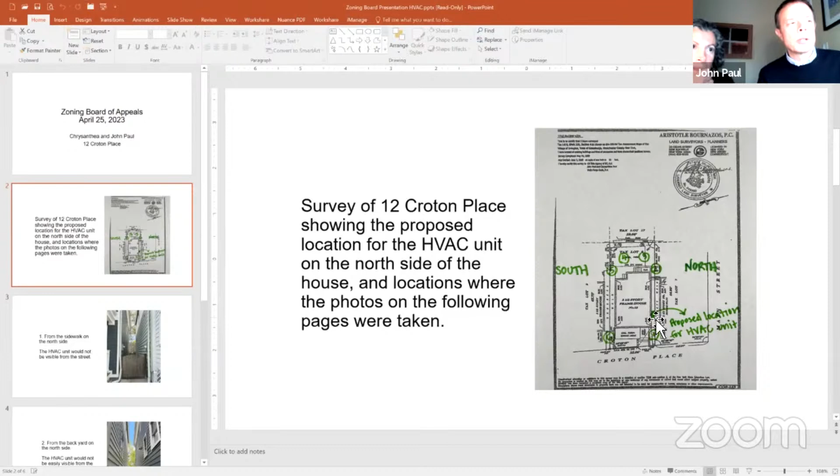Okay, so here on the second slide of our presentation, you can see there's a survey of the house. You have a copy of this survey in the application materials. We have marked the point here on the survey where the exterior unit would be added. It's about 14 inches deep, and you probably know this is in one of those alleyways between our house and our neighbor's house.

This is a view taken today from the sidewalk in front of our house. You can see there's a gate there, and the new unit would be down against the foundation of the house, so it would not be visible from the street. This is a view back up that same alleyway between our house on the right and our neighbor on the left. The HVAC unit would again be down by the foundation between us and that hose, if you can see it there, and it would be only slightly deeper than that hose. It's about a 14-inch reach into that alleyway.

Another point to point out, we have talked to our neighbors about this. Where it would be located would not be easily visible from their house either. Their windows tend to look straight into our kitchen, and there's a stairway here. You'd have to poke your nose against the window to be able to see our new unit down there.

So where's the property line? Approximately down the center of that alley. So it's shared between you and your neighbor. Yeah, that's correct, the alleyway. And it's shown on the survey. We could go back to that if you'd like.

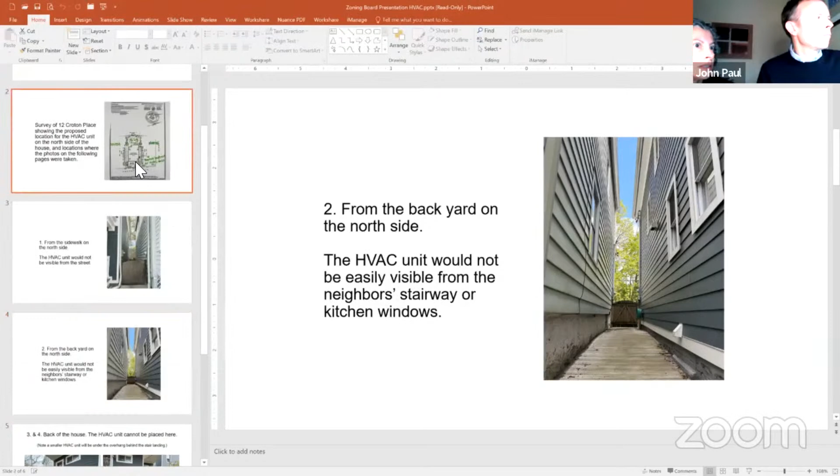Can you make that bigger? Give me a moment.

So you can see the surveyed property line down the center of this alley. There's the wall of the neighbor's house, our neighbor's wall. It wouldn't stick that much into the alleyway. It was just a big Sharpie, so.

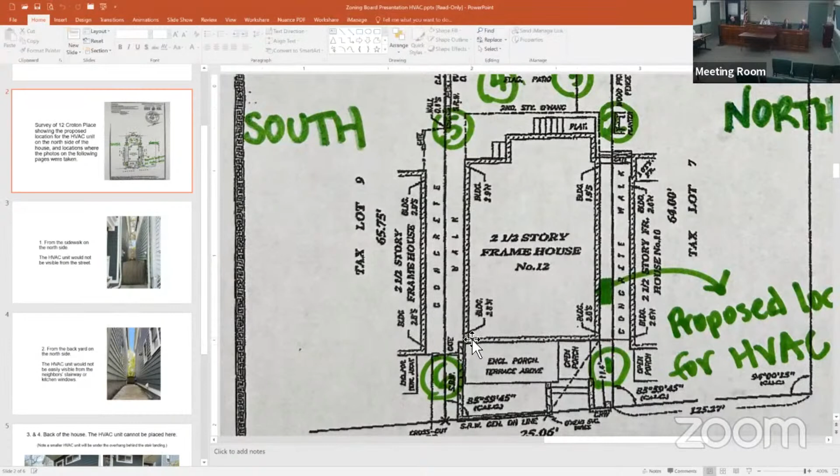Can you get past it without trespassing on your neighbor's property? It wasn't a joke, that was a question. Can you get past it? It would not intrude onto the neighbor's property. What if it would allow you to pass from front to back without having to go onto your neighbor's property?

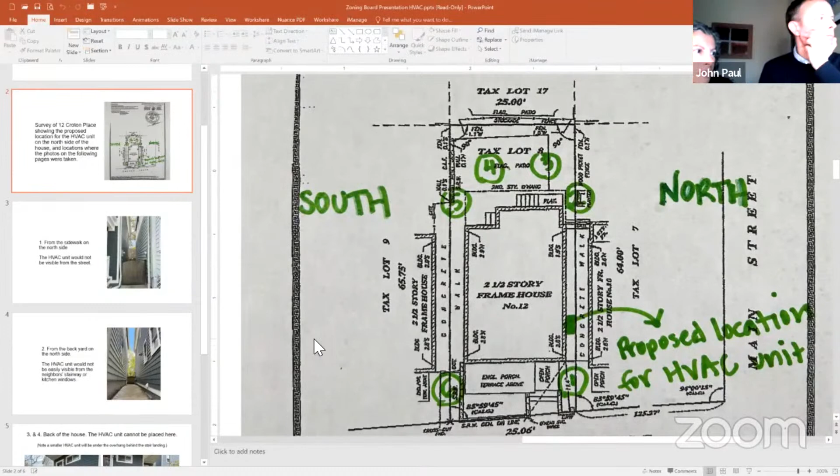If you go, John's bringing up the hose that you see in that picture is just a little bit shallower than the unit that's going to be there. So they can certainly, yeah, we could get by without going onto their line, I guess.

And what about the noise? Is this the north side? I'm sorry, what was the question? Is noise, will it be making noise? Oh, it's a very low decibel unit. We have been told that unless you're within 6 feet of it, you can't really hear it.

I think like 20, but certainly the house next door is within 6 feet of it. Yes, 22 decibels when you're right there, right on top of it. But the house next door is within 6 feet, might be about 5 feet away, but of course the nearest windows are farther than 6 feet from that.

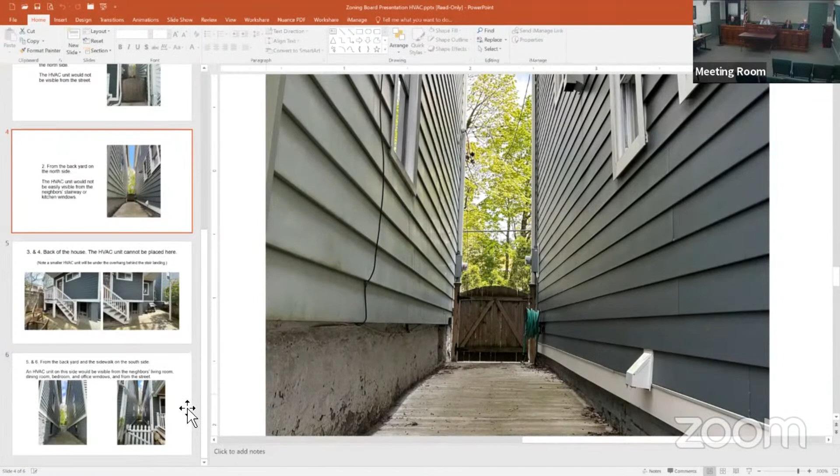Okay, any other questions? Yeah, I had two questions. In the beginning of the call, John, I think you mentioned you were installing a couple HVACs, or is this one of many, or is it just the only one? And then the second question is, I read in your submission that the backyard wasn't feasible, just to expand on the backyard option.

So another smaller unit would be under the stairway in the back here against the foundation wall that you can't really see in this photo. But the other one is just too tall, unfortunately. That's where we wanted them both, but they wouldn't both fit. And you see where the grill happens to be in this photo, it can't be there because that's an egress from the house.

Right, and you couldn't use the smaller one to replace the larger one with the one that now fits under the porch there? Again, the larger one wouldn't, it's just too tall to fit. No, I understand, but couldn't you use the same size unit on the side of the house as you're using under the porch? No, the one under this stairway is going to be for 2 units.

The other one's going to be for 5 units, so it's bigger. Otherwise we need like 3 units, 3 exterior units. Right, 3 exterior units, and that's not a good solution either. And they all three would not fit under, even if we got three small ones, they wouldn't all fit under this stairway because there has to be clearance for the air to move and stuff like that. So that's not a solution either.

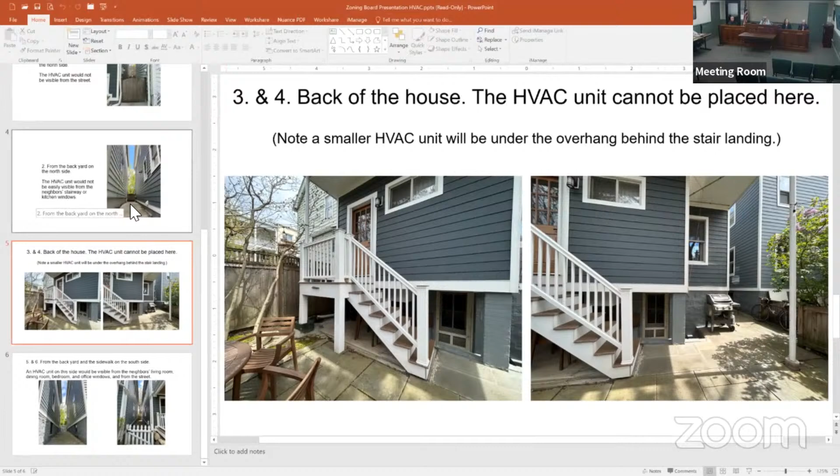Any other questions? Anybody from the community wanna weigh in? There's nobody here. Okay, no hands are raised. Anybody else from the board have any questions?

I'm gonna make a motion to approve. Obviously, we don't love giving two variances, but this seems to be sort of the only solution to do what you want to do with the property, and it's a pretty modest ask, all things considered. So I will make a motion to approve. Do I have a second? Second. Great. John?

Yes. Yes. I'm gonna say no, because of the fact that it's so close to the other property, I think it sets a horrible precedent. I mean, you already have a system, you can continue with the system. I understand everyone wants to turn into electricity, it's the way to go these days, but I think that just too much infringes on the neighbor's property.

Judd? Yes. No. Okay, so you are approved. I will send you a letter tomorrow. Great, thank you so much. Thank you very much. Good night.

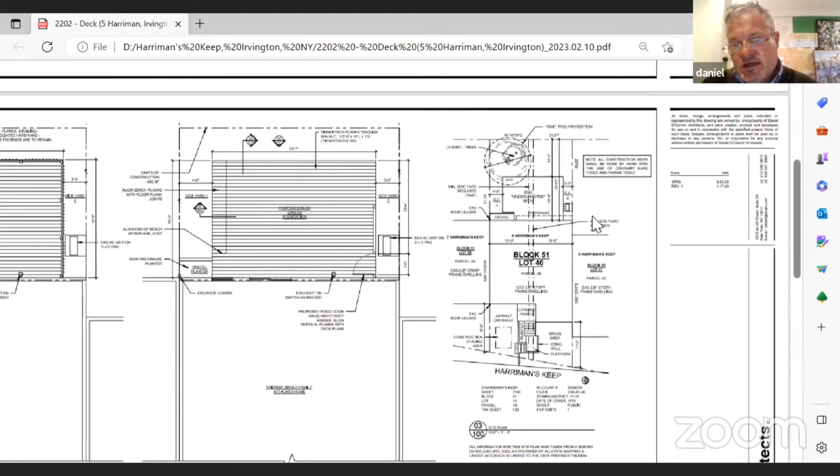And without the deck, is the property over allowable coverage, or within allowable coverage? Well, according to the general zoning coverage requirements, the property itself wouldn't meet those requirements. Right, I guess that's what I'm saying, meaning the house is over. The house is definitely over, yes.

And here we can see our schedule, right? And it is literally the same size, you're literally just replacing the deck.

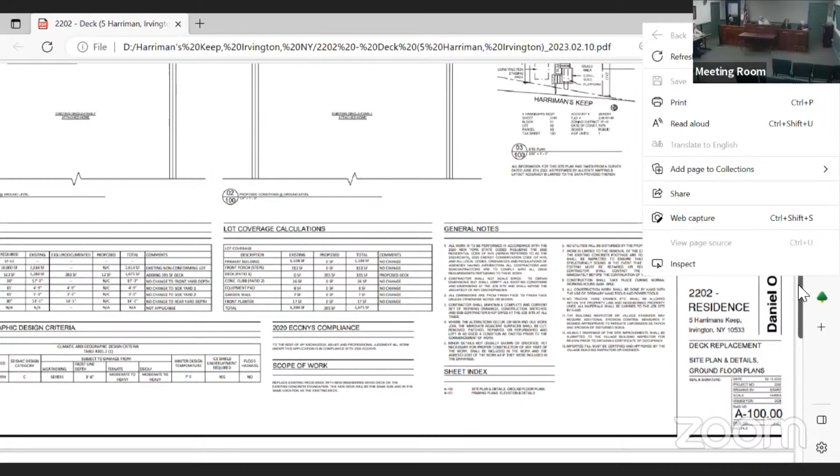Yes, repairing it. Except, I understand the woman who owns it said you're not putting up the railings on the deck. Where the railings would become an issue? No, not particularly, I was just observing that's the only difference, as I understand it, between what's there now and what will be there if we approve the variance.

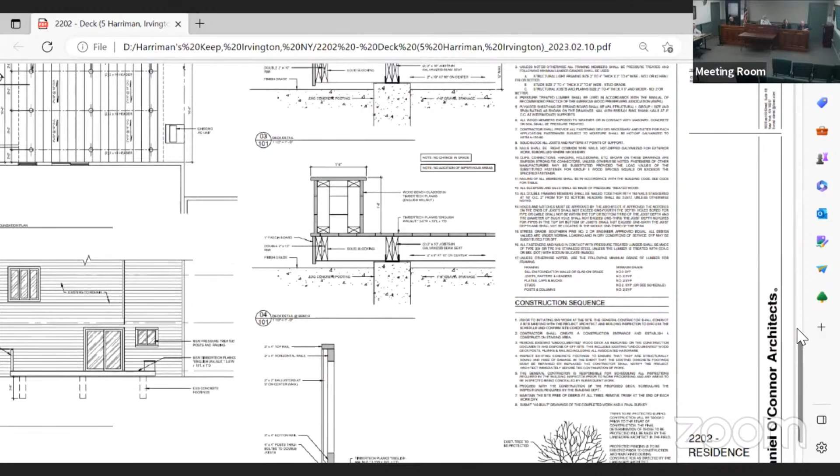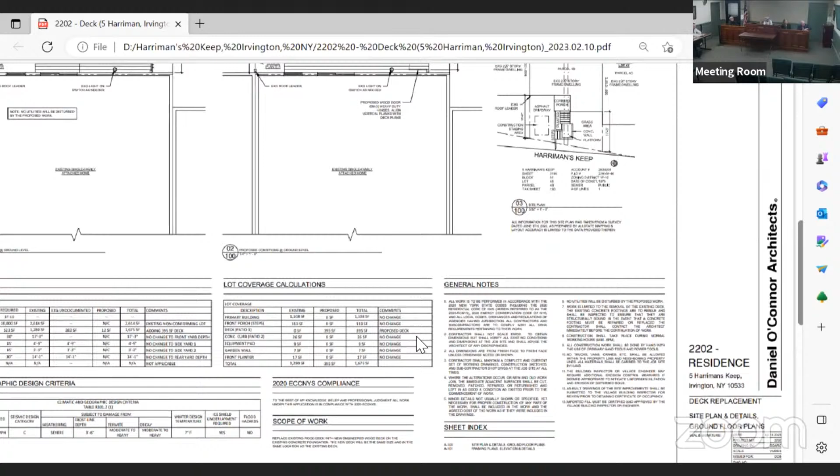Annie, could you make the lot coverage calculations at the bottom of this page bigger? Yeah, thank you, that would be great. Just zoom in. Sorry, because I'm not on my regular computer. Okay, does that help, a little better? No, I can't read the lot coverage calculations, I'd like to see them.

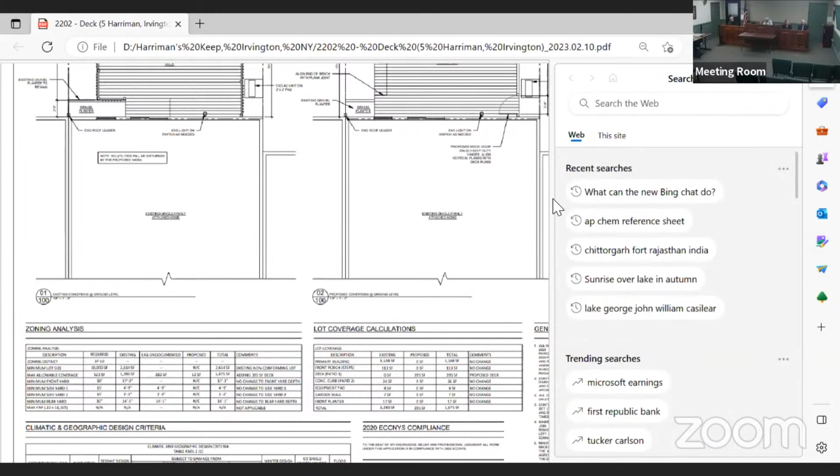Sorry, because I'm not on my computer, so I'm not familiar with this. Let's see, I don't think I can right now from here. Right where that plus sign is on the right side, could that maybe help you out? I've been trying, but it's giving me other stuff, other things, be careful with that.

Yeah, I can read it. We don't want to see other things. No, nothing else. I think this is as big as it can get. Can you read it to us?

Can you tell us what the coverage is? Sure. So the lot coverage of the primary building: existing is 1,100 square feet, proposed 0, total 1,100 square feet. Front porch steps: 112 square feet, proposed 0, total 112 square feet. Deck patio: existing 0 square feet, proposed 395 square feet, total 395 square feet.

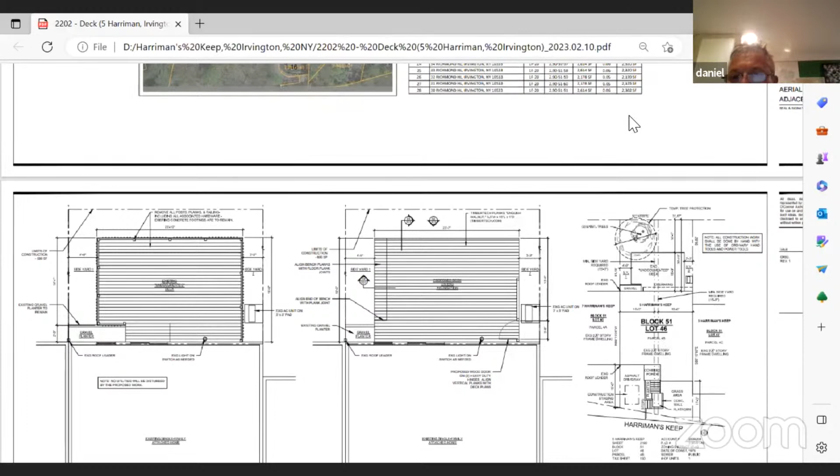There's 2 things I'm missing before I would approve this. One, I want to know if everybody else has a deck of the same size. And number 2, we have aerial analysis as well of the other 8 decks that are out there, I want to know how many are documented.

Yeah, I think those are fair questions. So I would suggest we adjourn this for a month, come back and tell us whether everyone else has the same type deck, and I'll go out there, I guess, and I apologize. And I'd like you to, and it's up to the chairperson obviously, tell us whether those 8 other decks or 7 other decks are documented or not.

How will it change what we do? I think we need to have a better record before we make a decision, is my point. I think it's important. Because if they're documented, and variance has been granted to all the neighbors, then it's an easy thing. If the variance has been granted to 2 of the neighbors, I think it gets harder. And I think it's better for us and for the board, for the community.

Understood. Everything was already approved by James Hahn Engineering and Ed Maron and everybody. I mean, I understand that's subject to the variance, a little confusing, but that's all good from their end, but they're looking at something different than we're looking at. So I would endorse that.

Look, 33 is a little high. It is, 20 I'm more comfortable with, but you're right, I was using the higher number rather than the lower number, and 33 is a little high.

I think it would be good for everybody to get the chance to get out there, but more importantly, I would think if you could do a comparison with the other 8 units there and let us know the size of their decks, and pull the property cards and find out if those are approved or not. That's not terribly difficult to do.

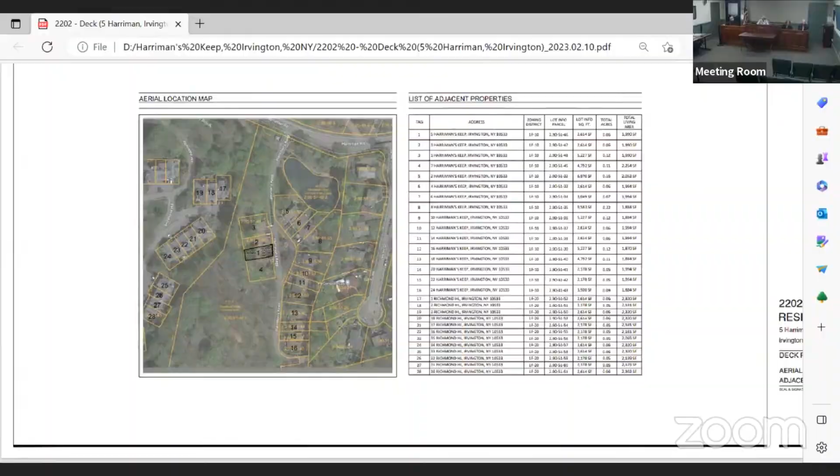Okay, so the next application is 33 Osceola Avenue.

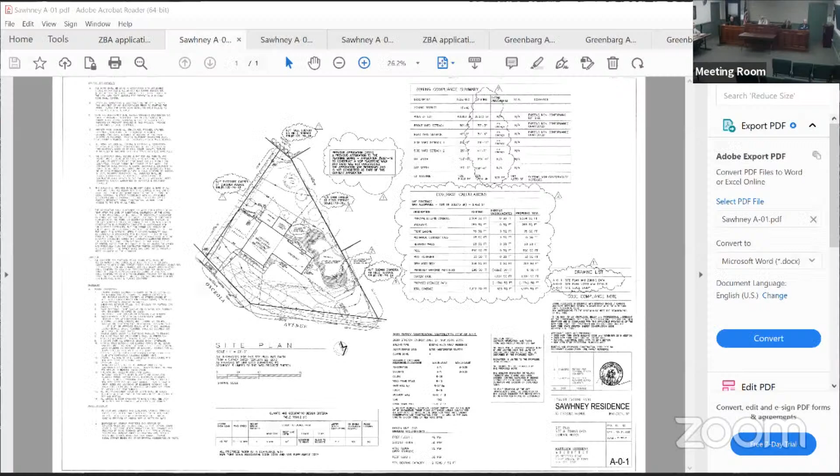Good afternoon, can you hear me? Yep. Ken, thank you, hi, how are you? Good evening, I'm gonna share my screen. Let me see if I can blow this up a little bit. Adjust your camera so we see more than just your mouth - we can see your eyes now. There we go. I'll have to sit back a little bit, let me just pan this out a little.

This application is to legalize an existing concrete patio at 3 Osceola Avenue. It's a little bit of a complicated application, I'll try to walk you through it. This is an existing concrete patio that was built in 1988 along with the pool. The shaded area here shows the area of the concrete patio. It predates the current owner.

This was all uncovered after the sale of the property, I believe in 2015. The current owner had submitted an application to the planning board to do some other improvements - doesn't matter what they were - and it was uncovered that the patio had been undocumented. So he put the brakes on the other application, and we're going through the process of getting this patio legalized. It does exceed the allowable coverage. I'll zoom in on the compliance summary - one of the issues here, let me just see if I can zoom in.

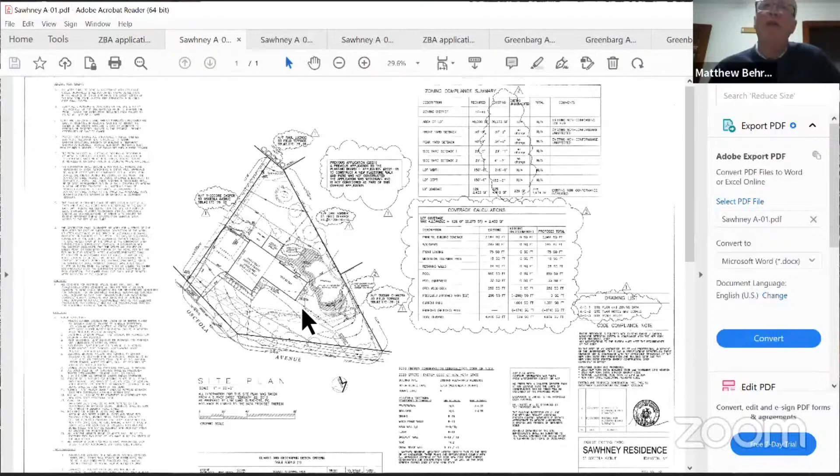One of the issues that makes this more complicated is that there's also a sewer easement. You can see my cursor here runs right through this section of the patio. So we have proposed to take this section out, about 174 square feet that we will be removing. This will decrease the existing coverage and eliminate the issue of being in that easement. So I'll jump up to the zoning summary.

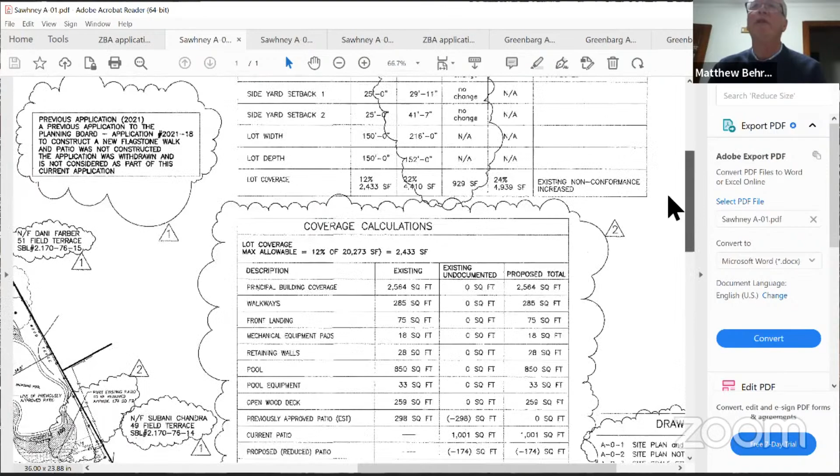For the coverage, the allowable coverage is 2,433 square feet. This is an undersized lot - it's the R40, a 1F40 zone, and it's a 20,000 square foot lot. So the lot is half the size of the zoning requirement.

So what we did is go back through trying to document and find what was documented for the initial pool installation in 1988. They were like back-of-a-napkin kind of sketches, but we were able to find that there was a previously approved patio. I put 'estimated' because the information is very sketchy, but it was approximately just under 300 square feet. So the current patio is about 1,000 square feet.

So it's an increase, and then we're taking out the 174 square feet where the easement is. So it's really just a net add between the previously approved patio and the existing undocumented area of 529 square feet. However, it is still a net add in an area that only allows 2,433 square feet. So it is a significant increase.

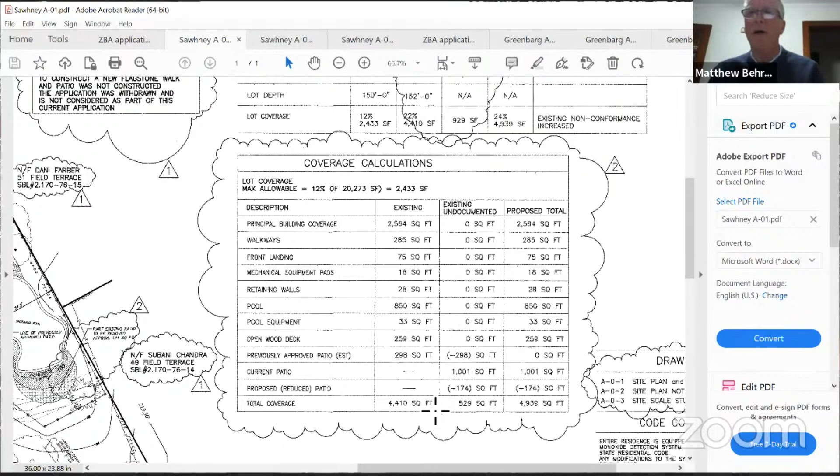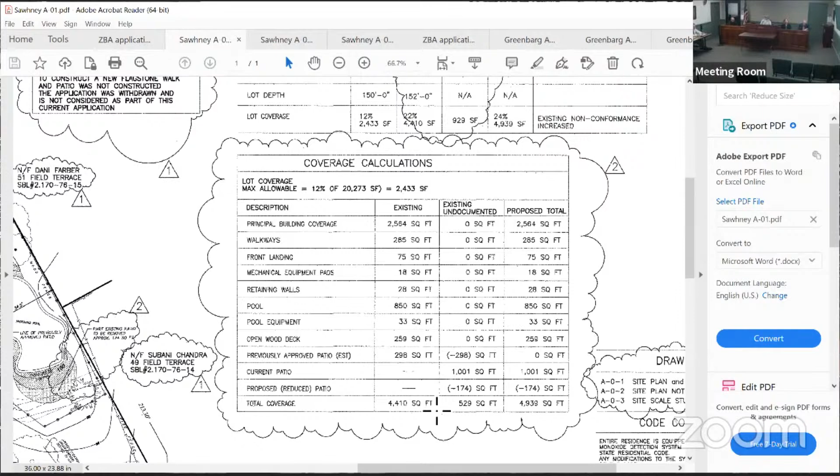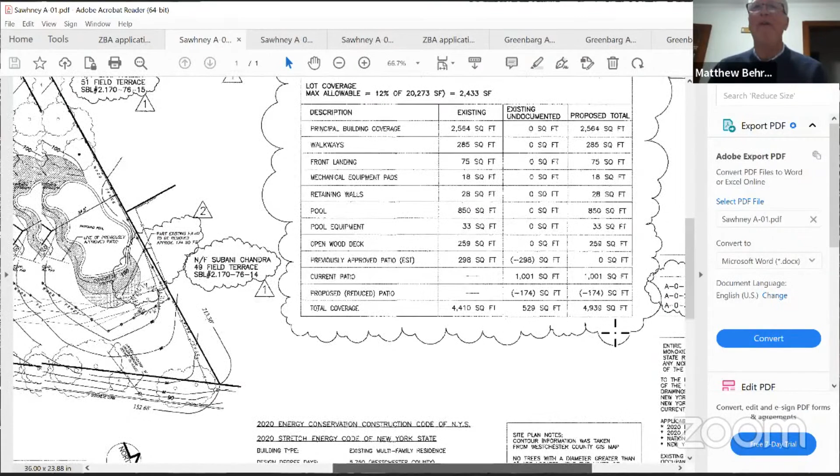It has also been in existence now for quite some time - since 1988. The property owner has owned the property since 2015 and does have a good relationship with the neighbors. The property is completely fenced around the pool, so it's not even visible - it's a solid fence. Despite the numbers, I think it is minimal impact. We are also proposing to decrease the current coverage by about 174 square feet.

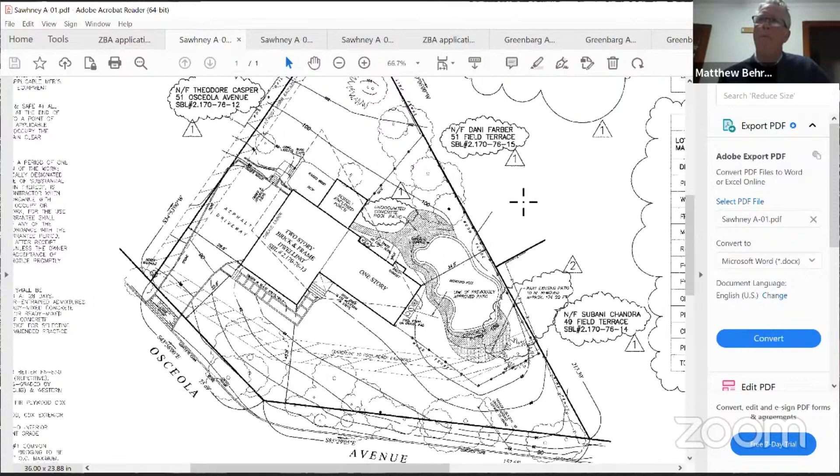When was that approved patio, which you said was about 300 square feet, when was that approved? That was approved with the pool in 1988. With a variance? That's a good question, I don't know if a variance was granted. I would imagine it was, yeah.

So the allowable there is 2,433. You are at 4,410, yes. Presently with the undocumented - that's with everything. That's all in, 4,410. That's without the patio though. That all includes the previously approved patio, the 4,410. It's at 200% plus of coverage, right? Yeah.

So I'm just curious, with the variance for the pool, was the patio already there, or did the patio get built at the same time or shortly thereafter? Like I said, the documentation is very sketchy. What did the building permit say? The building permit only references the pool, it doesn't reference anything about the patio. But the documentation that was submitted with the permit was a one pager, looks like it was drawn by hand, and has an outline of a patio. It's not called out, it's not described - it's just a line that comes off of the pool and connects the pool to the house.

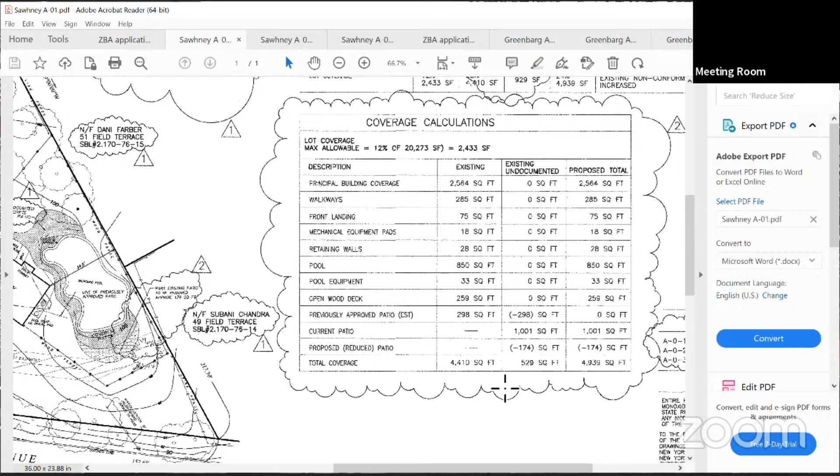And yet you had to take the 174, not as a gift, but because it was over the sewer easement, right? So we could have cut back just that section that's over it. We've taken out a little bit more to kind of round it off. Is there anything more that you could take out so that you just break even?

Well, possibly. Let me just slide back over to the plan. Right now, this section has no patio on this side because it's up against the fence. So really, this is mostly for maintenance, to get around, to skim the pool and whatever else you need to do, get in and out of it. I want to be able to maintain something around the edges because there's nothing here. So you only have access around these three sides, top, bottom, and side. But the right side here, there's no patio on that side. There's no other coverage anywhere else that you could add.

Exactly. Right. So, Artie, my view is that a pool without a patio is unusable, right? There has to be a patio somewhere. I don't know how big it has to be. I've seen pools with nice trim grass around it, but that's okay. That does exist in Southampton. Yeah, we don't do that on the Cape.

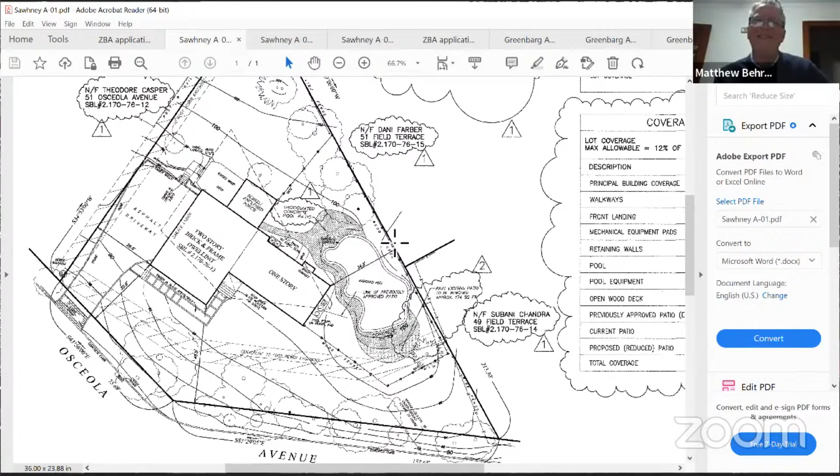Rest around my pool. But I guess overall, my point is over existing, you're only at 11%, that's one way of looking at it. Correct.

Well, over existing documented, though, right? Existing, documented, right. I mean, existing as in having substance, he's actually reducing it. That's correct.

Wow, it's so far over. I'm having a hard time wrapping my head around how far over this is. And to just say, yeah, another 529 square feet, what do we care when it's already so much? But it's undocumented. But it's true that he's not asking to add that, because that would be easy, I think, to say no.

Sure. But what we're saying is, it's existing, it's been there for maybe more than a skillion years, as Matt has described it, so it's been there for a long time. We generally do not make people remove things, generally speaking, unless it's truly offensive or dangerous or something like that. And again, we're only 11% over existing, which is something we've used in the past as a benchmark. So that's my leaning, in a way.

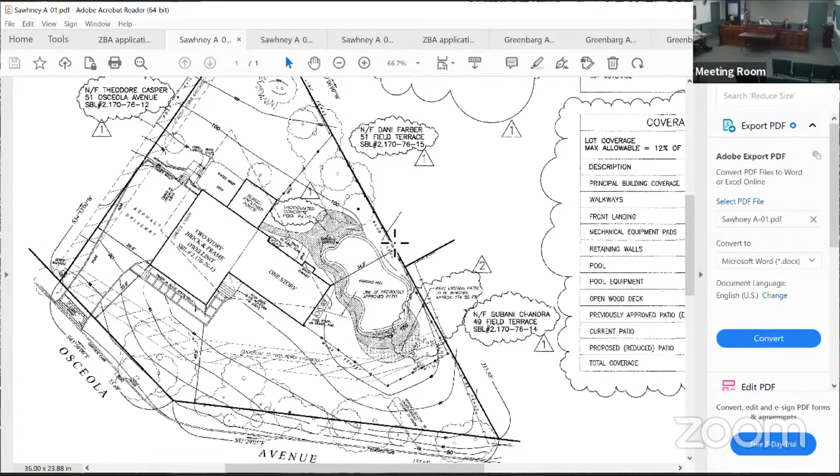Well, yeah, but I'm not sure we started with that much over, though. That's exactly what I was just going to say. We haven't started that far over to then say, you want them to bring another list of undocumented patios and pools in the neighborhoods that we...

So how old is that house? Matt, you know how old's the home? Is it like a home from the 30s or? I can look that up if you give me a second. I'm not sure when the house itself was built. I could look it up. Just bear with me one second.

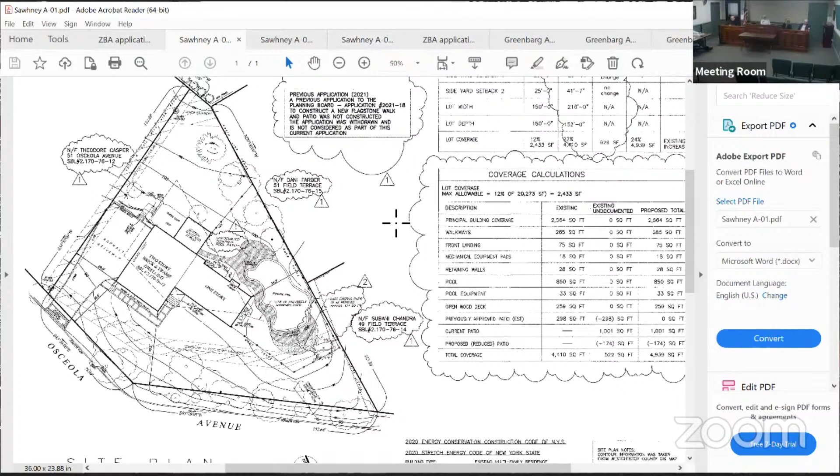The last 10 years, that'd be a real problem, wouldn't it? Well, but the pool is 35 years old. Right. It looks like it's a 1940, 50s house. It's sort of a ranch. So pre-zone, predates the zoning. Yeah, right, so that puts the house way back when to begin with.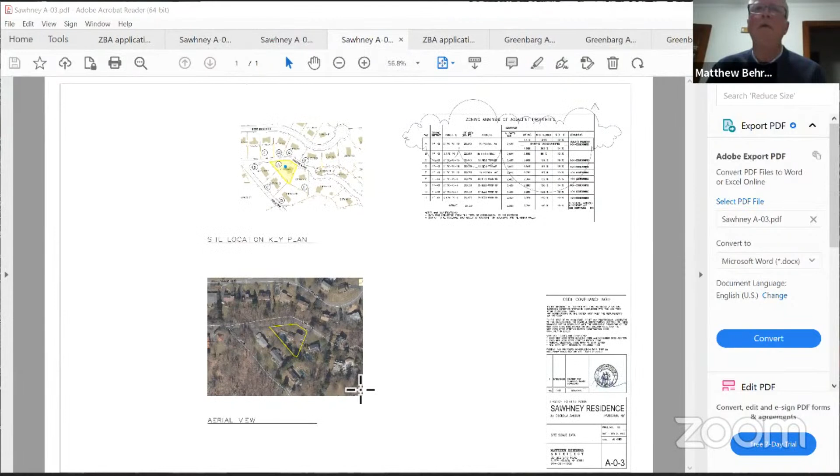Does it help? Let me show one other thing, hopefully this will help. I'm going to do a new share. What happened? Oh, here, sorry. So this is the comparative analysis of the surrounding properties.

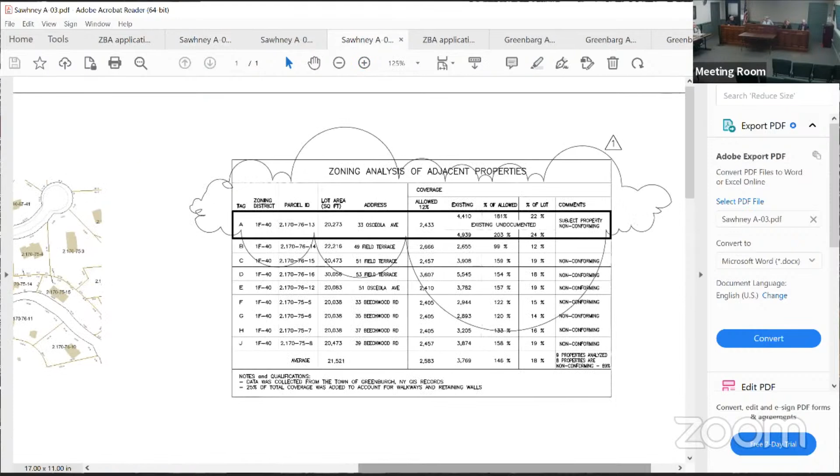Yeah, could you enlarge that? Yep, thank you. One more time, a little bigger. One more time. We're old. Come on. Speak for yourself, I'm old.

Yeah, there we go, 203%. And you can see some of the other properties, they're not quite as impactful as this one, but they're significantly over. And again, I'll point out that in a 1F40 zone, most of the lots are about 20,000 square feet. The one outlier is about a 30,000 square foot one here, but he's at 154% coverage. There's 158, 146. So lot average coverage is very in keeping with the rest of them, except for one outlier.

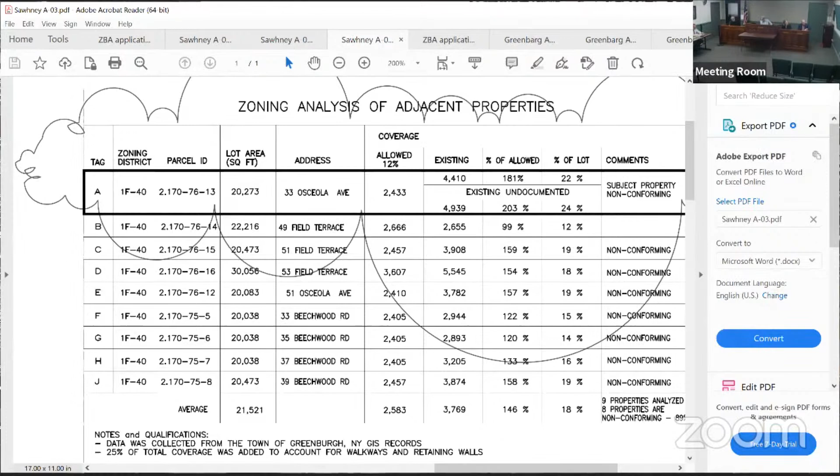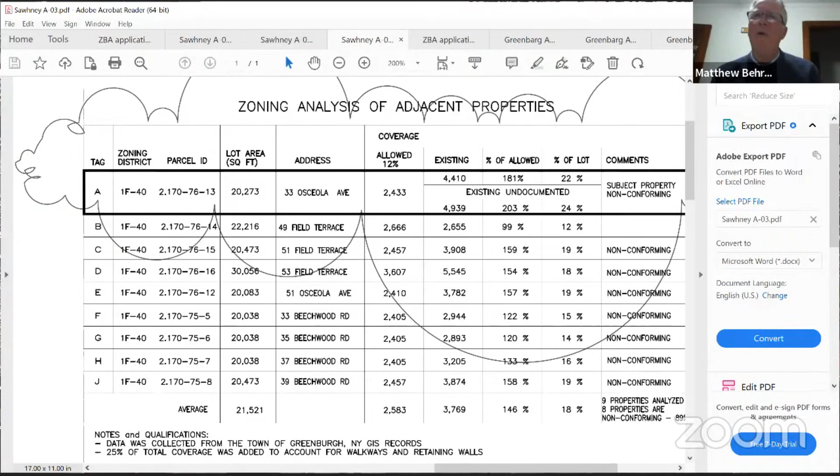Look, there's nothing you can give back to us on this. I mean, 203%? Yeah, it's a real outlier in your neighborhood, and the size of your lot really isn't. Again, it's a patio, so some of these coverages, if I look at the aerial, there aren't a lot of pools. There are 3 immediately adjacent right here.

This isn't like a structure, it's minimal. What really strikes me is how crowded that lot is on average. And the patio is just huge.

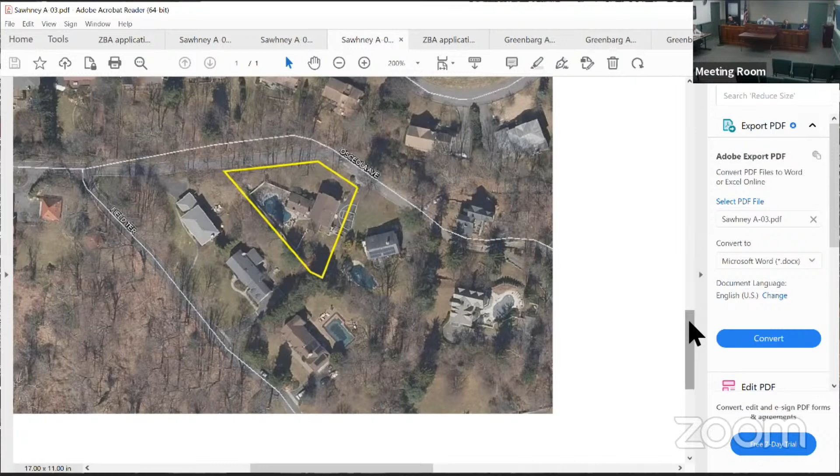My recommendation would be to sharpen your pencil and come back next month and tell us what you can give back on this, because that is a very crowded lot with a very big patio around the pool. And I'm only speaking for myself here, I don't know what my fellow board members think, but it feels right now like a no for me. It's in every way, both visually and by the numbers, out of keeping with that neighborhood. The number 203%...

I understand you're not coming in at 100, believe me, but there's a big difference between 159, which I think was your next closest coverage number, and 203. And there is a remedy. You can try to maybe trim down that patio so that it's reduced. But as I say, that's my recommendation.

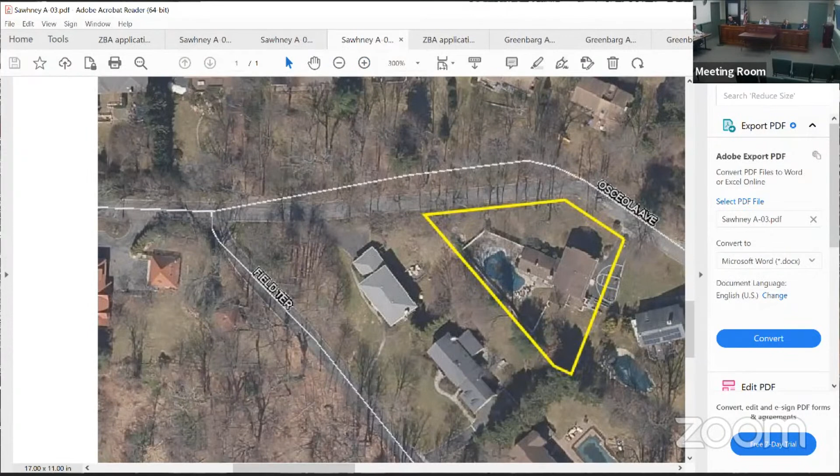If anybody else feels differently, please chime in. I would support what you're suggesting. I would say figure out where you could lose some coverage and come back next month.

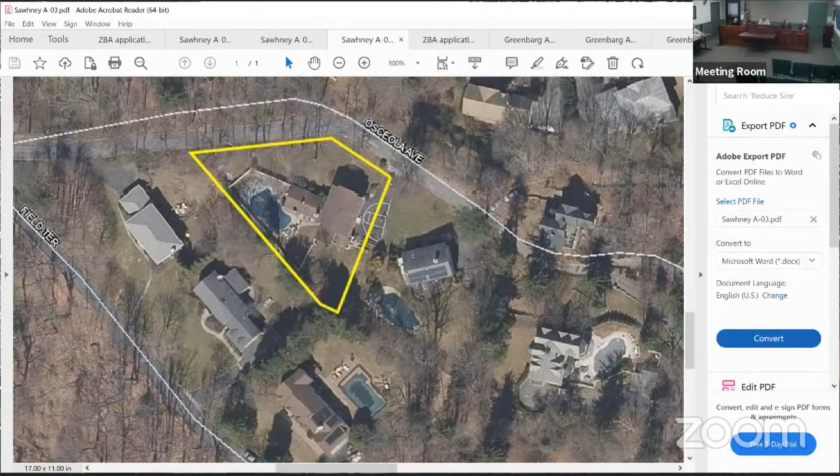So should we adjourn this? That's my recommendation. If you would like to adjourn it, you don't have to renotice it. You can just come back next month and have a chance to talk to the homeowner and see what they'd like to do on this. Yes, that would be great. Alrighty, so we will see you next month. Thank you very much.

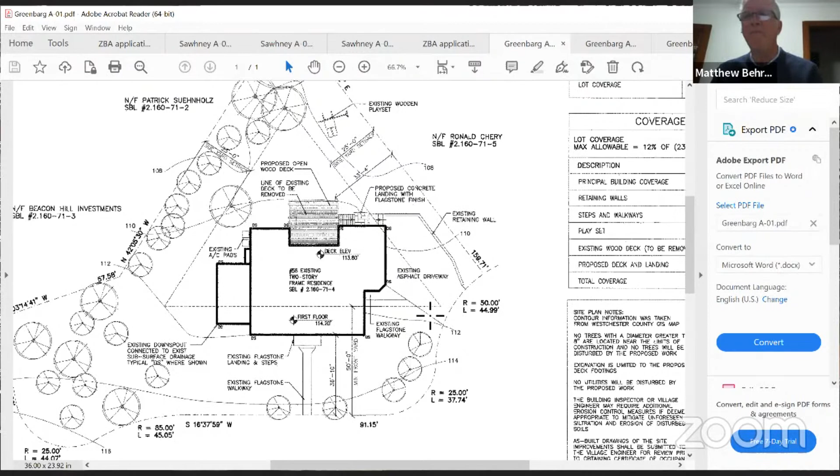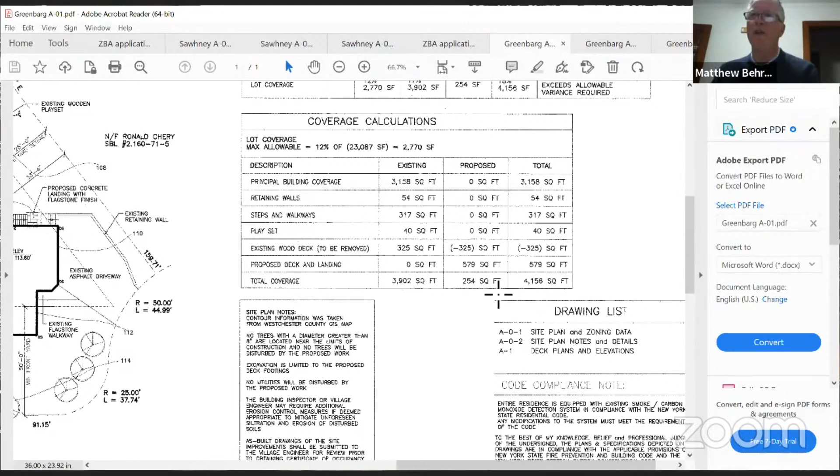This too requires a variance for the coverage. It is also in the 1F40 zone - it must be my favorite. It is also an undersized lot in that zone, 23,000 square feet. The allowable coverage is 2,770. The existing total is 3,902. However, with removing the existing deck and replacing it with a larger deck, it's only a net add of 254 square feet, for a total of 4,156.

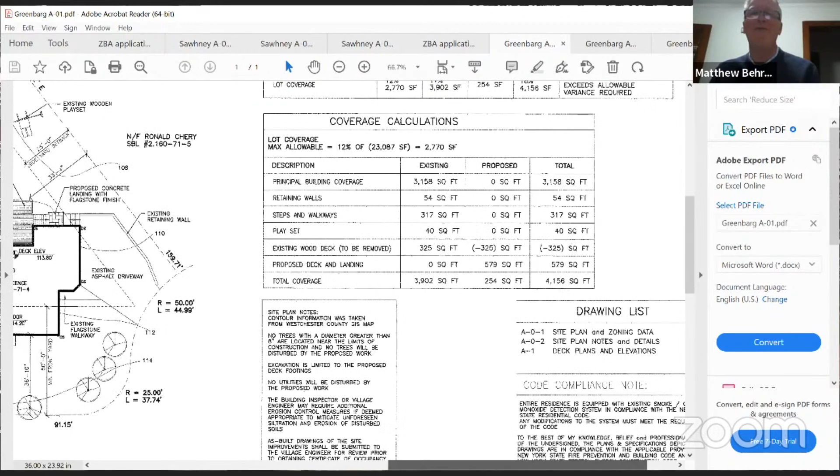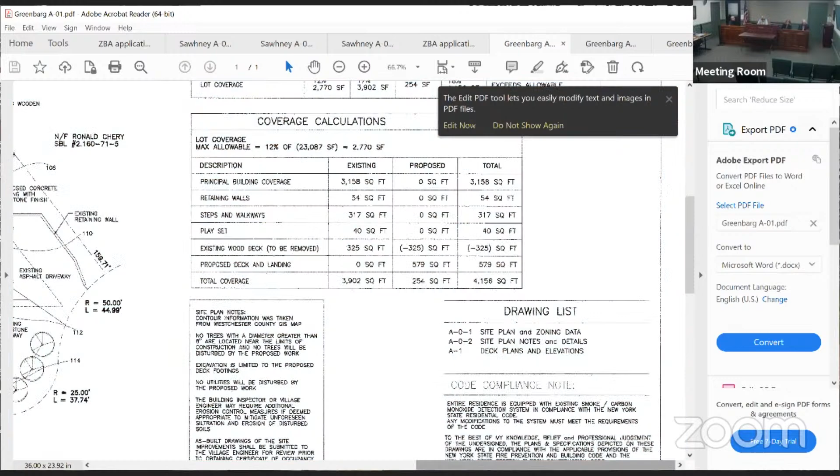And Matt, it's fully documented? Yes, the existing deck is fully documented. Okay, so what's the percentage over existing or allowable? What's over allowable - well, is it allowable or existing? Well, I'd like to know what... I'd just like.

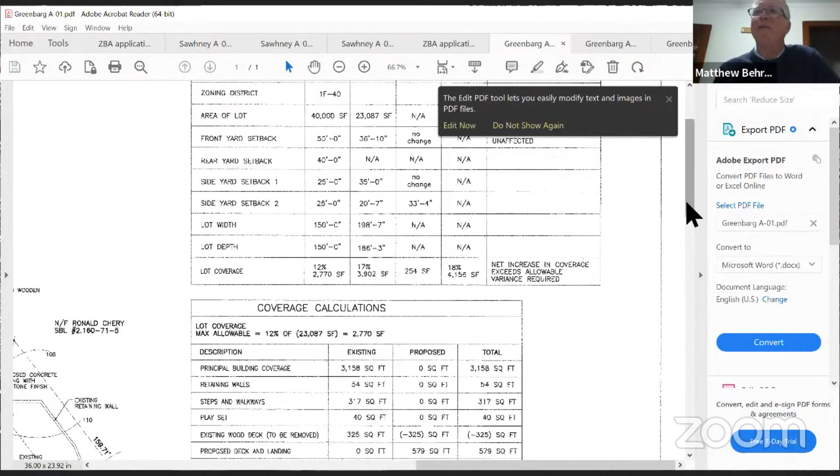Sure, so right now 12% is the allowable, where the existing is 17. Let me just see this. The proposed is 254, bringing it to a total of 18%. So it's only a 1% increase. But it's 150% over allowable - 18% over 12% is 150%.

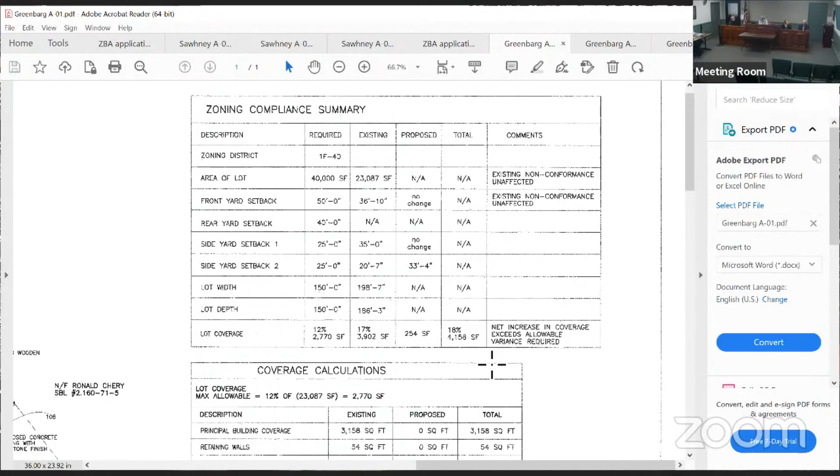That's a lot over allowable. Do you have any sort of idea of where this fits in with the neighborhood? I don't currently, but let me just see if I have a document that might help, just bear with me one second.

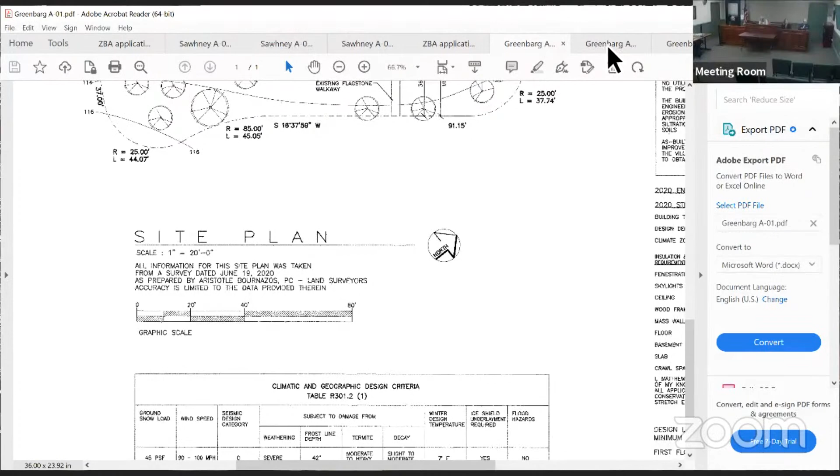And it's a raised deck, Matt. How far above the ground? It is a raised deck. It's about 5 feet above grade.

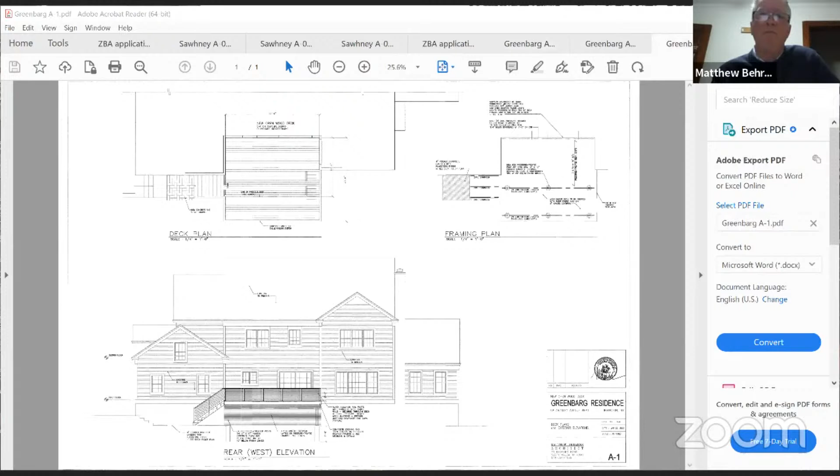I don't have it documented on here, but if you want to bear with me, I could do that and share it. Sure, let's take a look. Okay.

Because I have to tell you, I understand it's only 254 square feet, but it's already very far over allowable. And I just don't know how much insult we want to add to injury on that, unless you were able to show me that every neighboring building was that much over allowable, in which case it would be harder to say no, but.

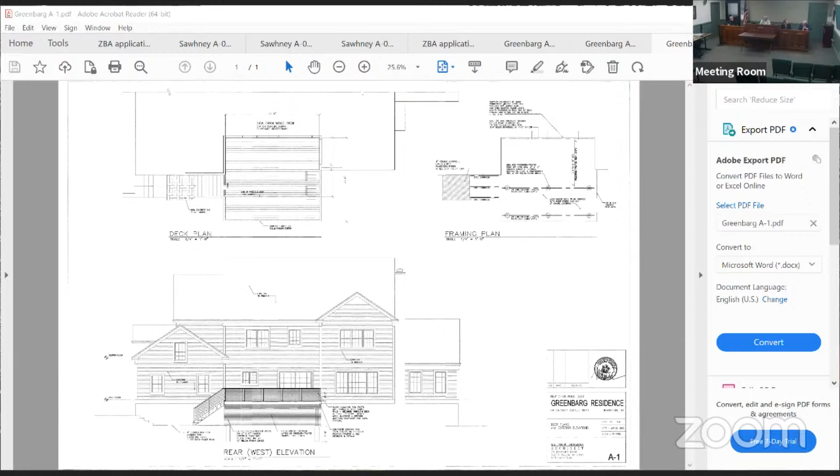And there's also a relatively easy give here. I mean, they can get a larger deck, just not as much larger as they would like.

Right, so just a quick overview here. Hopefully you can see this, I'll zoom in. Yeah, so this is the property. I think everybody knows this used to be the playhouse for Ardsley Country Club. Cul-de-sac here, yeah. This house is almost identical to the Greenberg's house. And there's a pool here with a pretty large patio. This house is pretty oversized for the lot.

So in terms of context, and then we have the other sections here that are part of Ardsley Park.

Okay, I mean, again, I hate to put you off another month and hate to send you home empty-handed on this, but my recommendation would be to come back next month and just let us know how far over the other houses in that neighborhood are. And if you feel like you're right in the midst of it, then I think you'd have a better chance of getting a yes from us. But if you take a look and find out nobody's as over as far as you are, you might want to come back with a slightly scaled back request.

Understood. Was that deck part of the original home, or was it put on recently? Was there a variance for that deck? No, there are no variances on record. It was built with the original home, though, yes. Or not, it's a very optimistic way of looking at it.

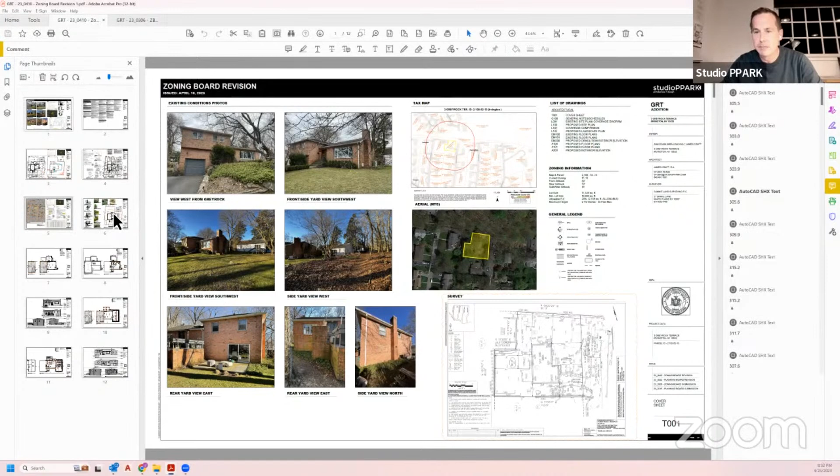Previously we had been proposing a first floor addition of approximately 700 square feet on top of our pre-existing coverage. We've dramatically reduced in several areas to bring us to an overall proposed addition of about 200 square feet. I can show you the comparative percentages of everything in a second, but just to bring you up to speed.

I'm going to show you the existing versus proposed, because I actually think it'll make more sense. So this is 3 Greyrock.

The existing main structure is 2,047 square feet. There was an existing first floor patio that was 236 square feet and an elevated rear deck, which you can see here. There's the existing patio and the elevated patio on the left here.

We're proposing now the demolition of both of those structures. Previously we were trying to maintain the existing patio. What we're proposing at this time now is only to add a deck back in kind.

The present deck that's there is elevated approximately 4 feet in the air, an elevated bluestone and concrete deck. It's not permeable by any means, with gravel underneath it. We're proposing a Trex deck brought down to just a few steps above grade.

It is a significantly smaller, 233 proposed square feet, which is also less than what we had proposed in the last iteration. And then the other patio is completely removed.

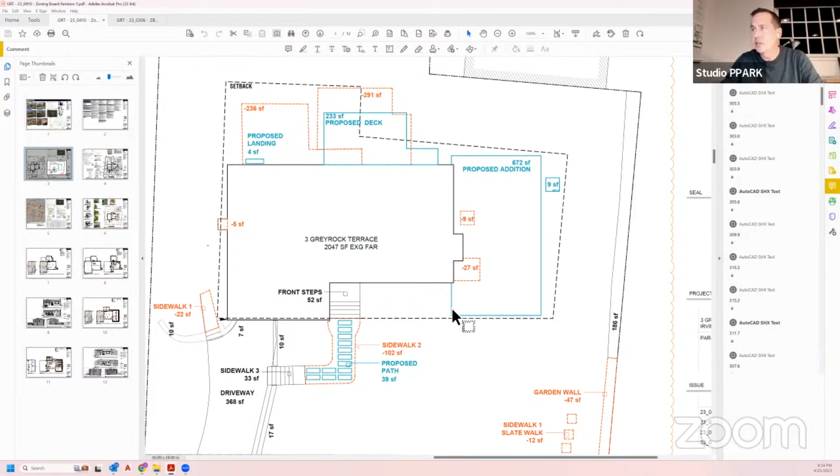We have also proposed reducing the entirety of the proposed addition by 20 square feet. We've also reduced our hardscape in general.

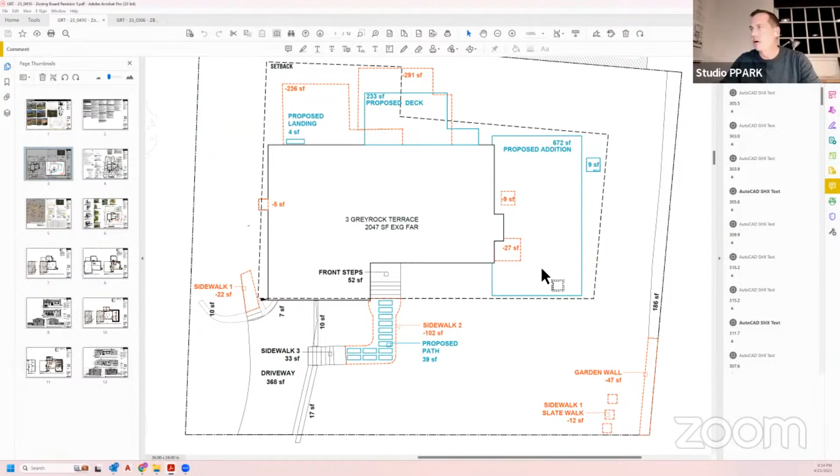We're removing a minimal sidewalk, proposing changing our front entry pathway, removing some remainder slate walk and some other bit of a retaining garden wall to bring our proposed coverage down to much less than what we proposed last time. That being said, still over.

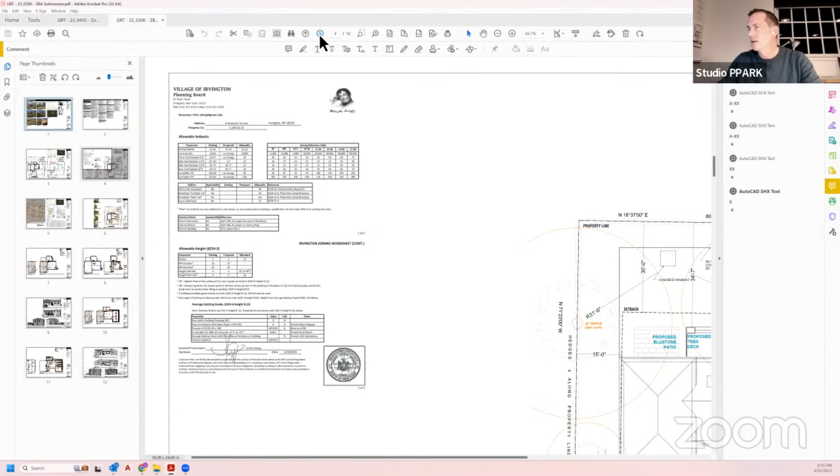So just to kind of show you in more detail where that lies previously versus proposed. So this is our previous neighborhood comparison and coverage proposal.

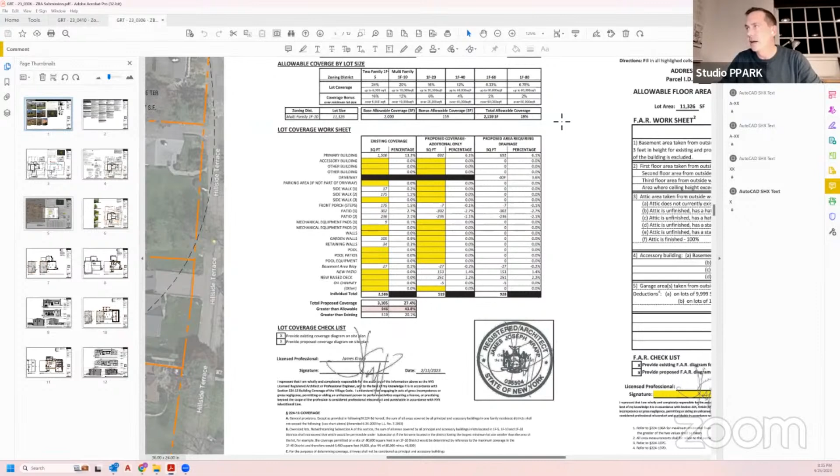Previously, the existing allowable coverage was 2,159. James, could you zoom in a little bit more so we can see it? Sure. More. There we go. Thank you, is that better? Yes, it is, thank you.

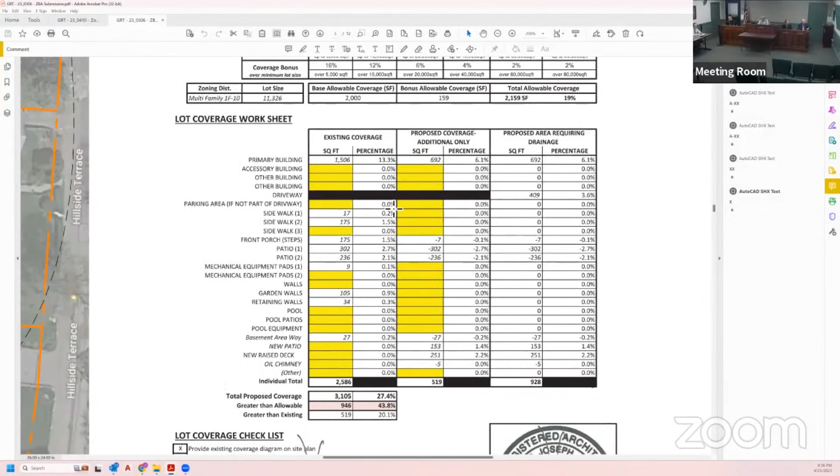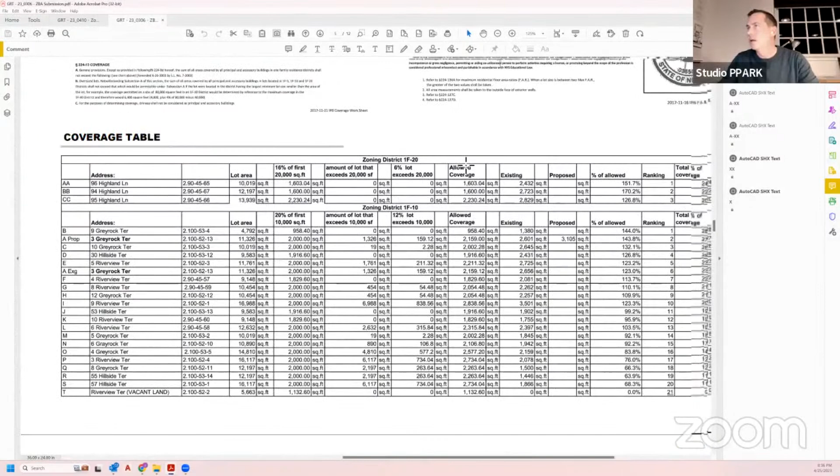So just to zoom this out, can you guys read this? A little bigger would be better. Okay, so let me just show you.

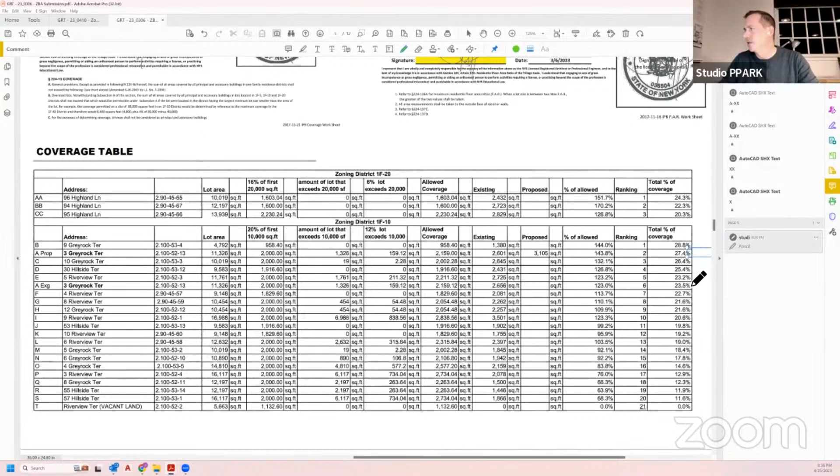This is where we were proposed in the neighborhood, and this is where we were existing. So I'm just going to highlight these over here so we can zoom in. Essentially...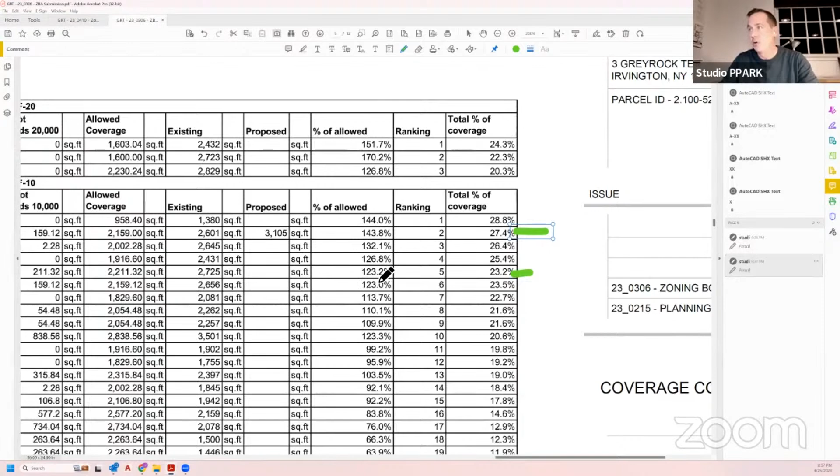Our original proposal brought us to higher in the neighborhood. We were already 123% of allowable, and our proposal was bringing us to 143%. Now, that being said, other people in the neighborhood are closer, but it was high.

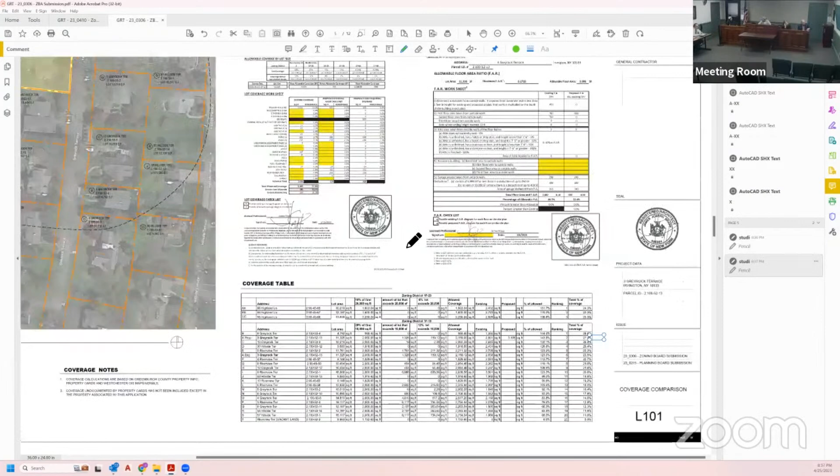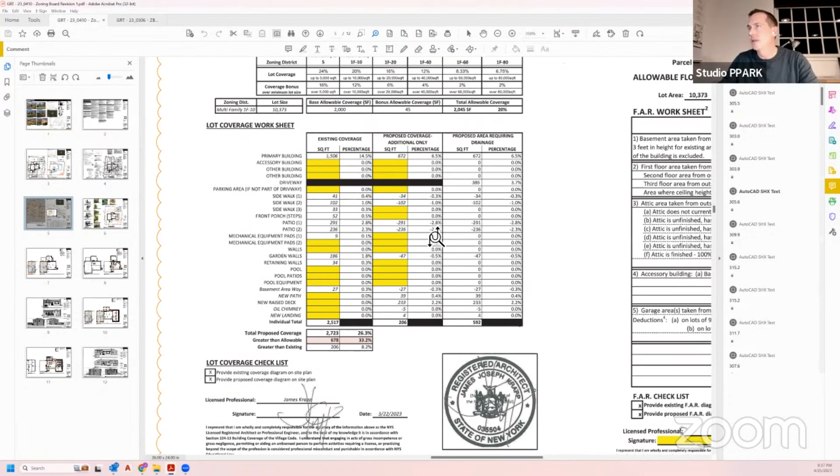So we've pulled back, and just to walk you through those reductions in a bit more detail, or I guess more granular down to the numbers, I'll zoom you into the same view of where we're at today. So can you guys see this?

Yes. So this is back to our lot coverage. So we found out the property is actually about 1,000 square feet smaller than we thought, which meant our allowable coverage was under, so we had to reduce even more than we had hoped. So the allowable was 2,045.

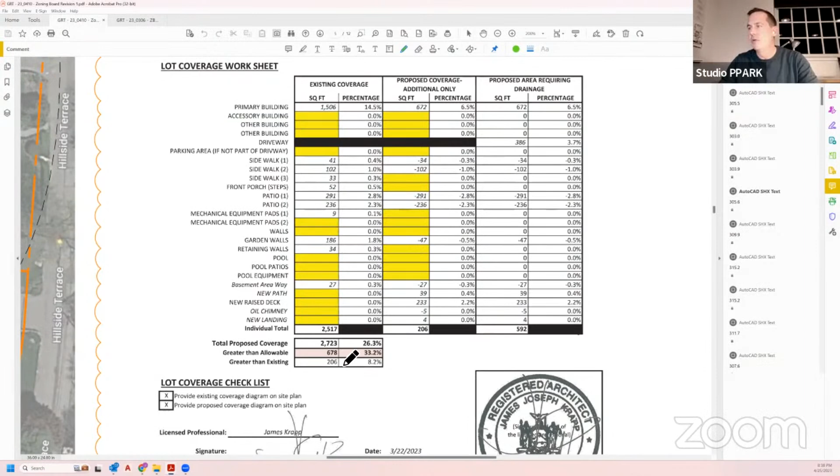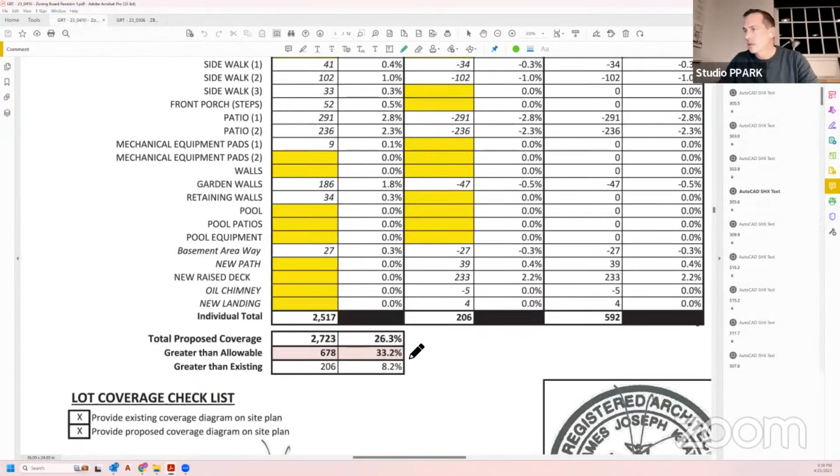So what we did was all of those items that we discussed: removing the patio, reducing the proposed addition, reducing the proposed deck, eliminating or reducing the front entry pathway, along with other miscellaneous things. We've brought our greater-than-allowable down to 678 square feet as proposed, compared to before, which was about 946.

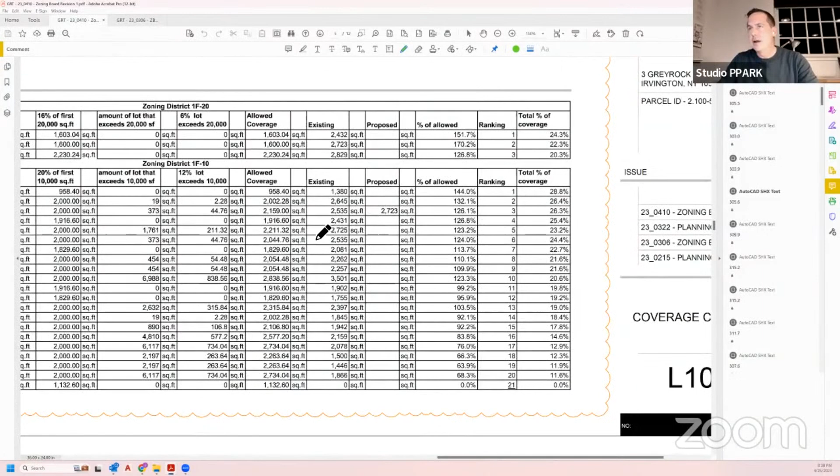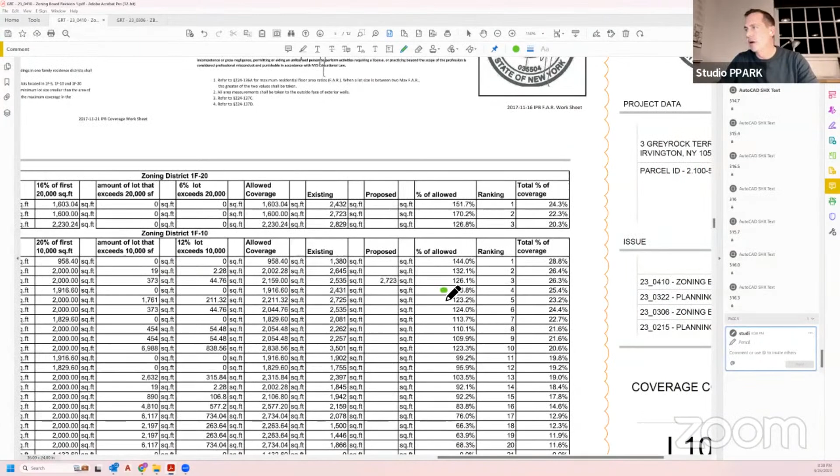So just to refresh my memory, that brings us to 33% over allowable. Now, when you compare that to the neighborhood, this number before was closer to 140%, and now we're at 126%, which is much more in keeping with where we were. It's a pretty substantial reduction, still over, obviously, but we think we made great strides in reducing the proposal.

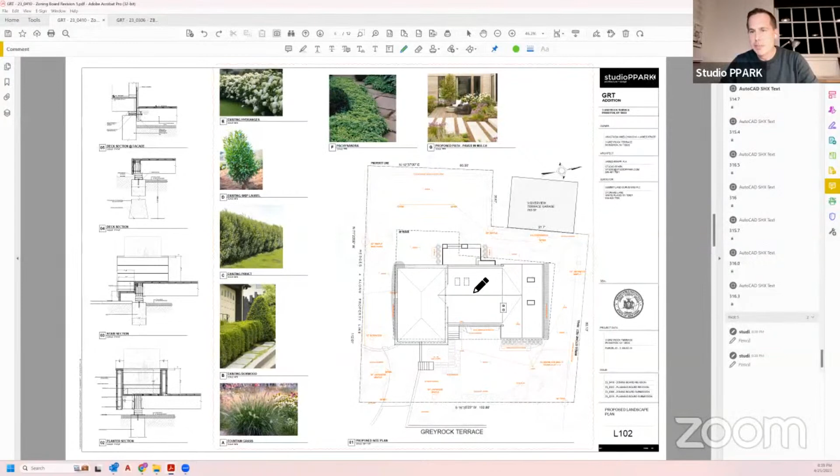Just to reiterate, we're trying to keep this as a first-story addition for multiple reasons: maintaining trees and canopies, reducing visual impact to the site. It's challenged by grade, I'll leave it at that. Essentially, vertical additions will not be met very well visually. So we're hoping this reduction is met with positive feedback, and I look forward to any questions or comments you might have.

Could you tell us—I think you went over it quickly—let's talk about the structure, forget the pavers, forget making the walkway smaller. To me that's not an apples-for-apples trade-off with the structure; I think they're both different. Tell us about the addition you want to add. Are you still adding the same thing, another bedroom, another guest suite?

Yes, it's a first floor addition. Presently we're a 3-bedroom, 2-bathroom home, and we're proposing changes.

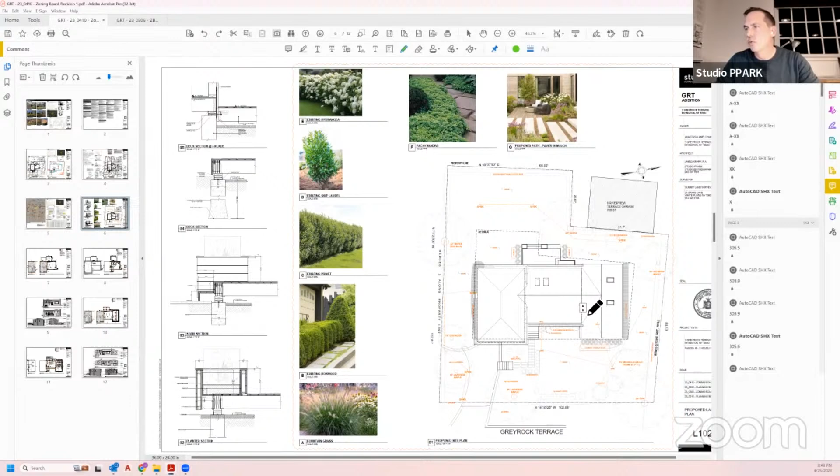So here's our first floor, just for frame of reference. Can you guys see this? That's existing, that's current. Presently this is our living, dining, kitchen space, and existing patio. What we're proposing is this space.

The addition that we're proposing is moving the kitchen over to here so that we have a proper dining space and a bedroom suite, so we'd hopefully be at 4 bedrooms and 3 bathrooms now.

So how does last month's building addition compare to this month's? It's reduced across the board, 20 square feet, 6 inches on every side. The deck is also reduced. I know about the deck, I'm focused on the building structure. The building structure is reduced by 20 square feet.

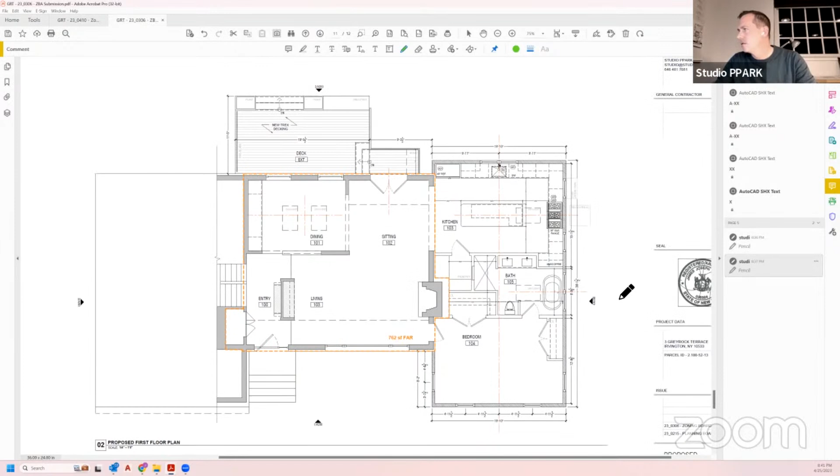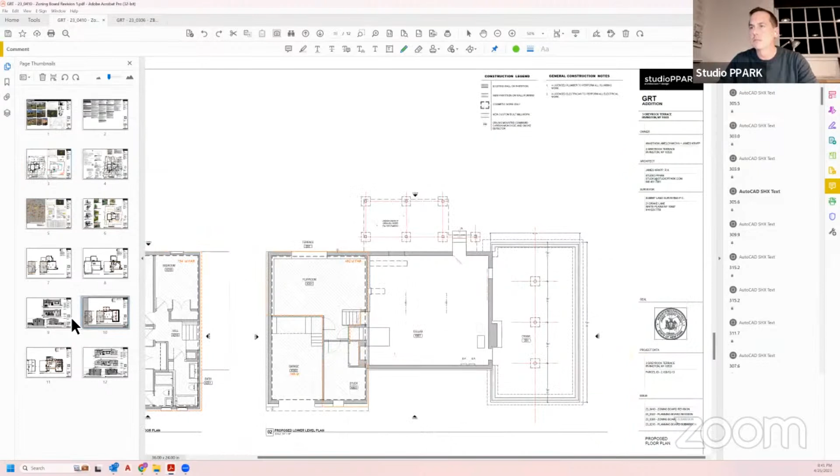Any other questions? Any questions from the community, Sarah? Nobody raised their hand. Okay.

I'm going to make a motion. I do appreciate that you came back with a substantially smaller proposal, and I appreciate the give-backs—the patios and things like that. I think that makes a visual impact from the neighborhood point of view and the property point of view, having walked by it today and used my imagination. I think those numbers, though high, reflect a whole neighborhood that is high, and with this proposal you're much more in line with where that neighborhood lives.